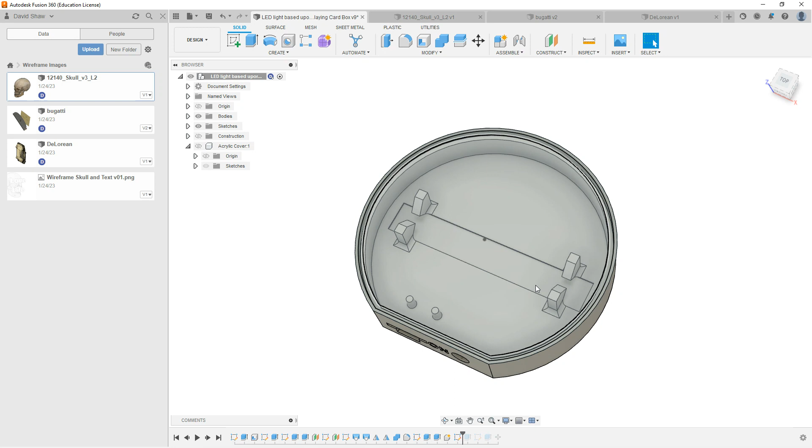So basically this is where the LED strip's going to go. I've got these little brackets that hold the acrylic sheet in position. I've got some little bosses here that hold, in this particular case, a micro USB socket so I can provide power, and I've got an on-off switch.

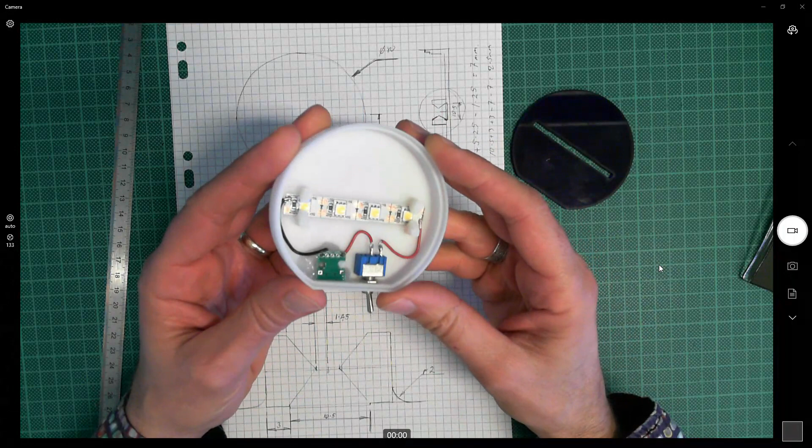And if I have a look at the camera again here, we can see that as our 3D print. One of the pins broke off here for the printed circuit board that was slightly oversized. So the one I've just shown you was an updated version of this, but basically it just gives a bit more rigidity for holding the USB socket here. Got plenty of glue gun in there holding that down as well. I've got the cutout just perfectly scaled here just to have a nice neat flush edge there.

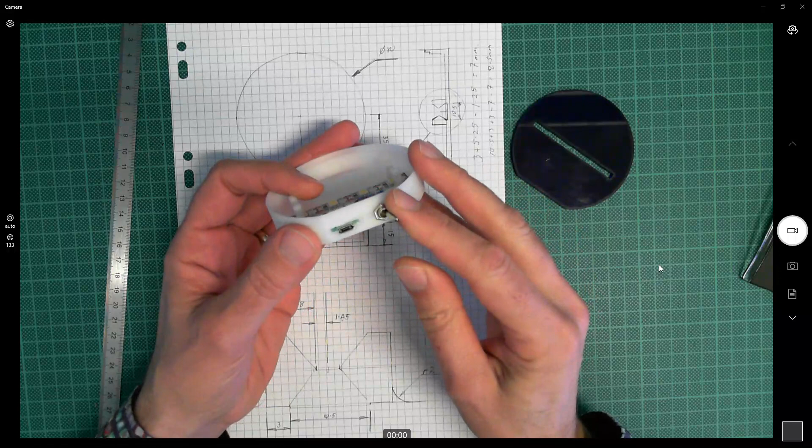There's my on-off switch, and I've got a simple series circuit here. I've got the voltage from the micro USB socket plus 5 volts running through this red wire through the switch that acts as an interrupter. I've made it so that the on, I don't know if you can see it there, it does actually say on, is when you push in that direction. That then goes around to the positive supply of this LED strip, and then goes to the negative side of that LED strip, and then connects back through to the negative side of my power supply.

I can attach the positive rail here, I'll put it that way around. The positive rail here is all the way along the top, and in this particular case, the negative rail is all the way along the bottom, and I can solder the positive here onto any of that top rail and the negative onto any of this bottom rail.

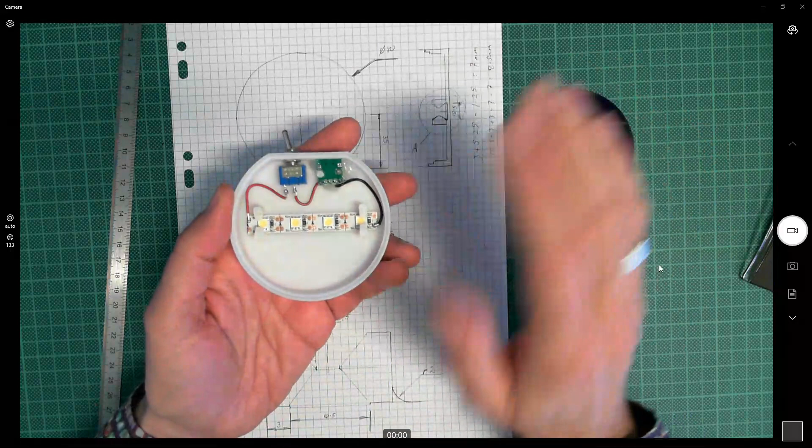So that's the printout. I've also got a little ledge in here as well, which is similar to the playing card box project, which is also on the channel here. And then I've created a little lid here, which I'm then going to be placing on top here. There's the cutout that the acrylic is going to fit down into, and you can hopefully see that the LED lights just are going to shine up through the acrylic sheet.

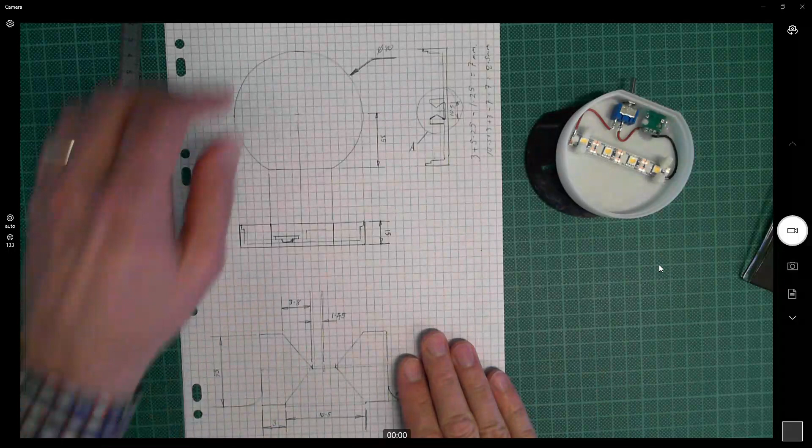Now I'm not going to push this down because it's going to be a demonstration model. Let me just bring up my CAD file here. So here's my drawing that puts all this together. One of the things I've not got here is the cutout, which I then developed in my TechSoft file afterwards. So let's just bring that up now so we can see what we have got.

So here's the CAD file that laser cut the lid, and here's my original file right here. So I've scaled this all to the same size as my base. I didn't show the dimensions in Fusion 360 there, but those are exactly the same dimensions. This outside line here, which is black, which is not cut on our laser cutter, is the actual size of the 3D print. That's 80.

And then I've got just a 1mm contour here. So this brings this into 78mm because, of course, I have 1mm reduced on this right edge and 1mm on the left, which is 2mm overall. So 80 minus 2 is 78. That's then identified as a blue line for cutting. I've got this little indent here for where I'm going to have my micro USB socket and my switch, and then here's the cutout slot for the acrylic sheet, which is 3mm in thickness. So that's what I've laser cut.

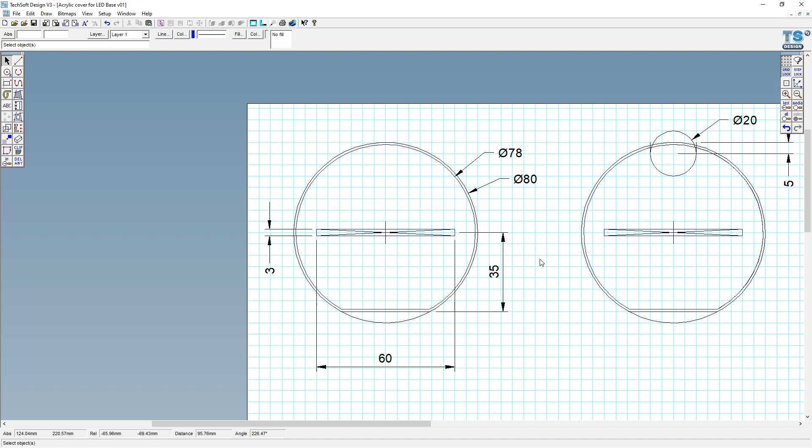What I'm actually going to do is do another top for my sample here, for which I'm going to have a little finger cutout here. And the reason for that is because I'm wanting to make it so that once this is pushed into position, I can then put my finger in here, lift that off, and then as a demonstration, people can see what's happening inside the actual 3D prints. But obviously for my final version, I wouldn't want the finger cutout in there if this was to be then put on display. Okay, fantastic.

So that's where we are so far.

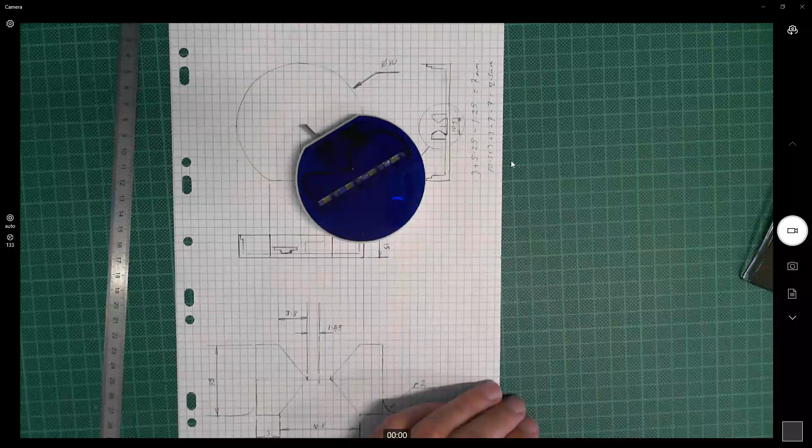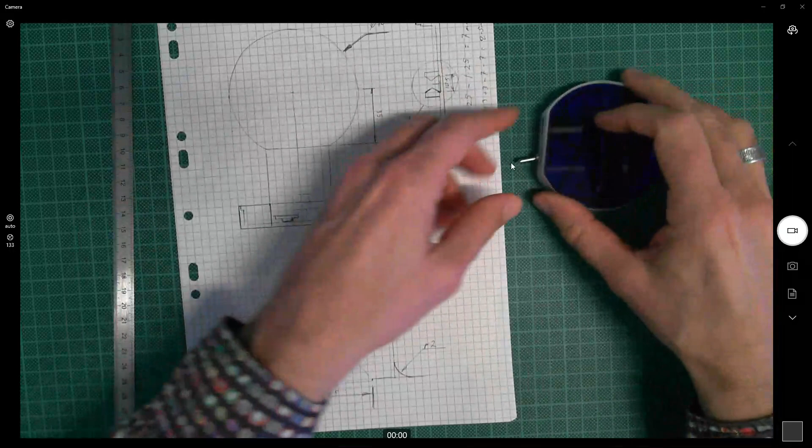In my diagram here, I've got this orthographic projection, top view, which hasn't got the cutout on and hasn't got the indent yet for where the lid sits. But I have identified some details here. Technically, I shouldn't see the indent here because this should be just the front edge external view.

And then here I've got this cross-sectional view, which is basically showing what's happening with these little cutouts. So it's more like an open-ended wireframe view, with the dimensions mapped out there. Down at the bottom, I'm trying to map out what's happening with these little supports that hold the acrylic in position over the LED lights.

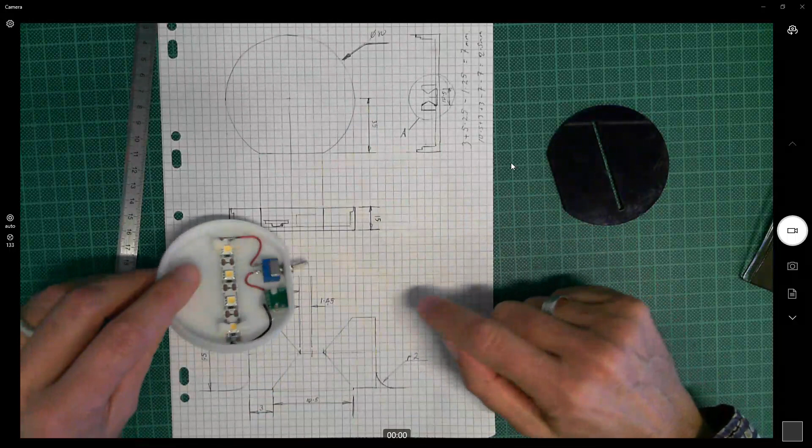I'm not completely convinced by these. They're not flexible at all, and I'm worried about them breaking off. So I feel as if this definitely needs developing. If I was going to do this again, I would definitely do something more flexible here, so it grabs the acrylic sheet.

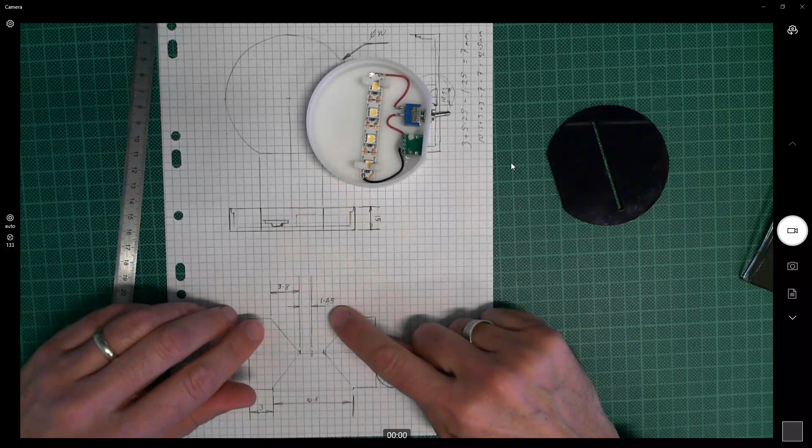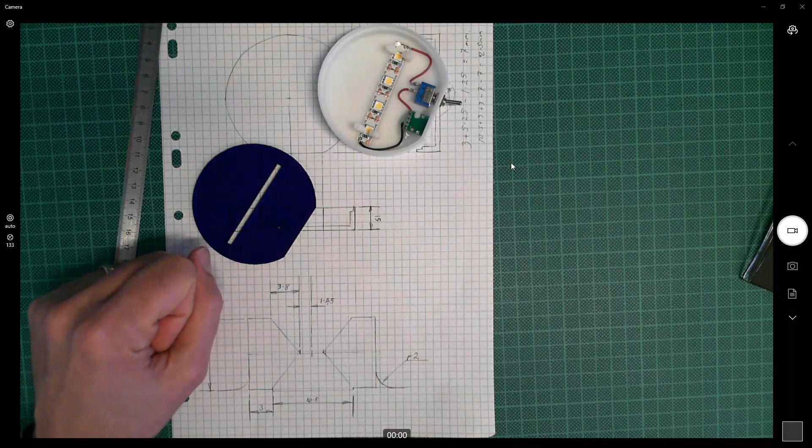I'll point out as well that I've made it so the gap between the two pins that hold the acrylic in place is 1.45 plus 1.45, which is 2.9 millimeters, and the acrylic sheet should be about 3. So it means it's going to be a bit of a tight fit, and it should grab the acrylic there, it shouldn't be rattling around. But there are slight variations in the thickness of the acrylic, so that's not an exact science.

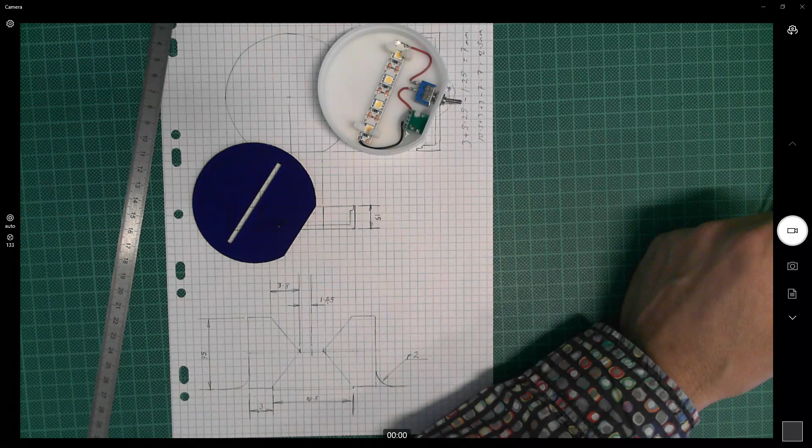Okay, so let's see where we are going to go with this. What I want to do is create some wireframe laser engraved images like this. So what I've done, let me make sure I'm going to the right place, is I've come to this website, which I'm going to share through my lesson plans, and I'm going to download this 3D model of a sports car.

There are all sorts of different file formats here, and you need to make sure you've got an appropriate 3D file format that works with Fusion 360, which is what we're going to be using to create this wireframe view. I know that OBJs work, blend files don't, unless you have access to Blender and can convert it into another 3D format.

So what I'm going to do instead is come to this website, which again I'll share the link with you. I'm going to drag this into this window here, and this is going to extract the content online. And there's my OBJ, let's click on that. Once that's finished, come back to my downloads, and I've now got that as an OBJ file.

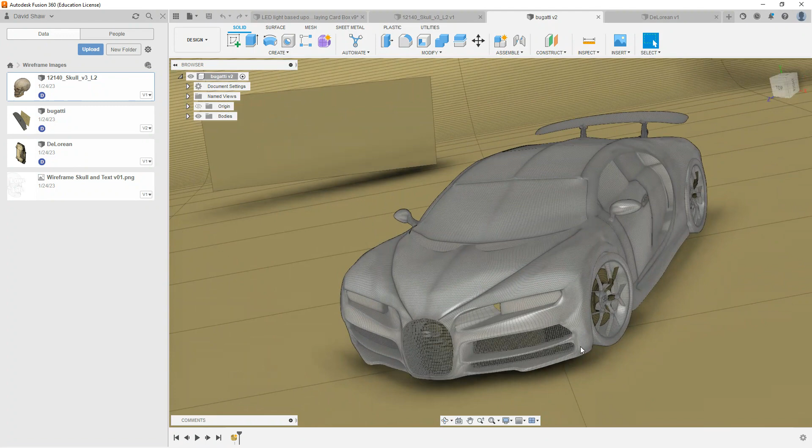What I want to highlight here is the fact that this has got this Back to the Future text on the front, which kind of messes up the wireframe visuals I find. So I'm not so keen on that one. And I've got this Bugatti image, which is super cool. The problem is that this image is actually embedded in a much bigger mesh, and we could do something about trying to clean this up and get rid of everything and just keep the Bugatti, but that's going to be a real mess to do.

So I'm not going to work with images that look like this, I'm going to avoid those. I think the skull is great. And the DeLorean, well, let's just first bring in this new graphic, and then we'll have a bit more of a chat about how we're going to represent these more clearly.

I'm going to go here to upload in my data panel on the side, make sure your data panel is available. I'm going to go to upload. I've got this in a new project called Wireframe Images. I'm going to drag in that image from my downloads folder, and let's see if it likes it. Okay, I'm going to save it to Wireframe Images.

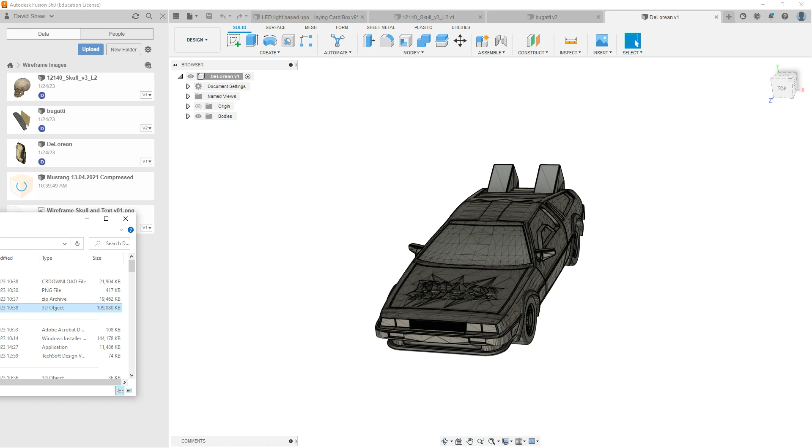And you can see now it's thinking to itself. Now I'm just having a quick look here. This is quite small, isn't it? It's quite a small image. But it looks like it might be, oh no, looks promising. Let's see, is this going to be happy? I think I'll just pause the video here for a second.

Okay, so this has been going for about 2 minutes now, and it's still thinking to itself. This might be an upload speed issue, but I have to say, I didn't think it would take this long. The fact that it wasn't able to open it in that 3D viewer application, which is part of Windows here, is a bit of a concern. So there may be a problem with this.

So if this is the case, what you're going to have to do is try and find another image. Be careful about which online sites you go to for downloading 3D images, because many of them you have to pay, or sort of subscribe and make an account with them. That's completely your choice. The one I work with here, you don't need to have an account.

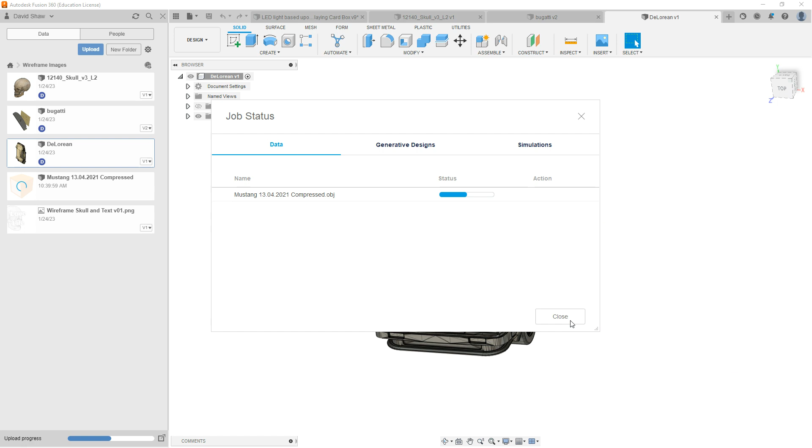Okay, so what I'm going to do while that's thinking to itself, I'm just going to see what happens there. Can I come back to some of these other files here? No, I can't for the time being. Well, I tell you what, I'm going to close that, because if I close it, it's going to keep on processing. That's not a problem.

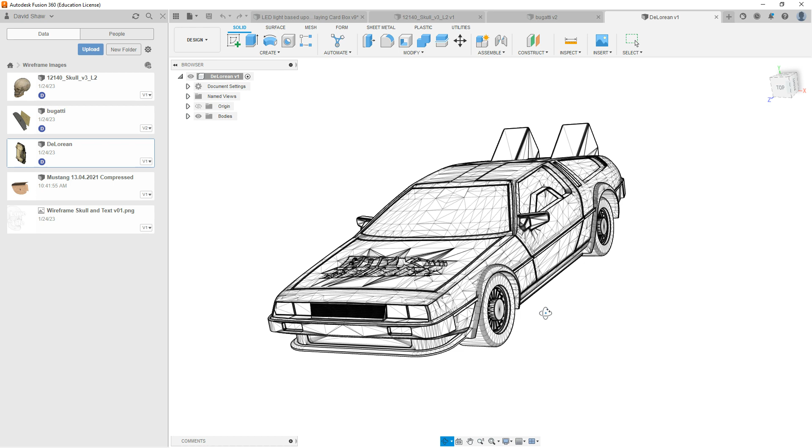So I can see here that I've got this view. If I come to my display settings at the bottom, visual style, this is currently shaded with visible edges only. I've got a whole range of different options here, and I'm going to come down and have a look at, for example, wireframe with visible edges only. And now we can start to see that kind of Back to the Future logo there.

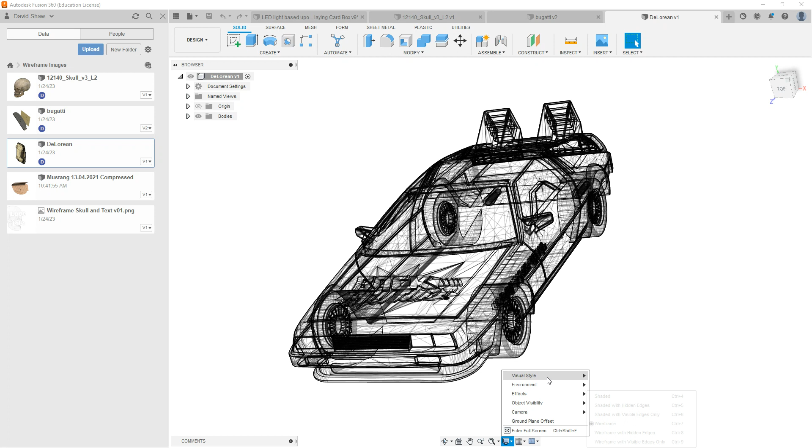That's one way which I could create this. Let's see what else we've got. Visual style, wireframe with hidden edges - that shows everything, and I find that's really confusing. And if I just go to wireframe on its own, that's very similar as well. So I find the best one to go with is visual style wireframe with visible edges only.

Let's go back to my skull here, and the same way, let's just kind of spin this one around. Let's try and get that level off again with the home button, and then kind of pull this around. Okay, something like that, nice. Visual style, wireframe with visible edges only - that's what I'm wanting to capture. I'm going to zoom in a bit on that as well so I can see it more clearly. That's the one I think I'm going to work with.

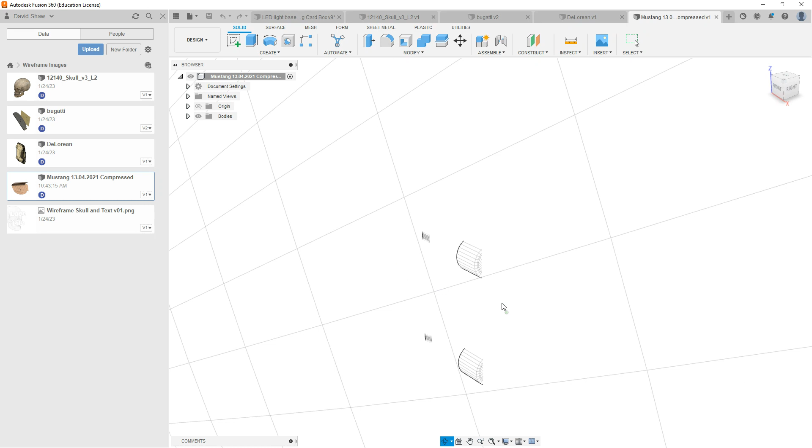Let's see what's happening here with this Mustang. Now I can see there's something similar to what happened to the Bugatti. If I just double click on that now and open this up, again, it's having a bit of a think to itself here. And we can see here that yes, I have to zoom right into this. And what's happening here? Do I have to spin it around? Yes, I do have to spin it around. And there's the vehicle.

Let's just zoom in on this now, which is great, but it's going to be a real mess for me to manage that. So I'm just not going to bother with that one. I think I'm going to close that one down there, close down the Bugatti as well, and the DeLorean too. I'm going to work with this skull.

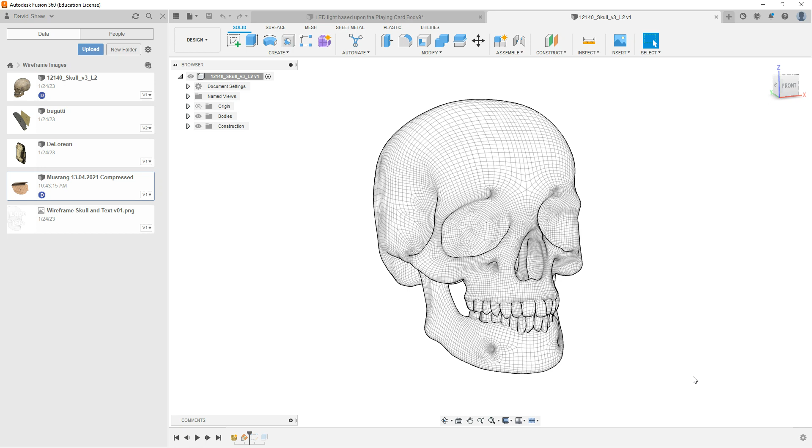Okay, so I'm going to stop this video here. In the next video, I'm going to look at how I'm going to take that image out of Fusion 360 as this wireframe view, and then basically laser cut it as an engraved image so that it becomes part of my LED light. See you then.